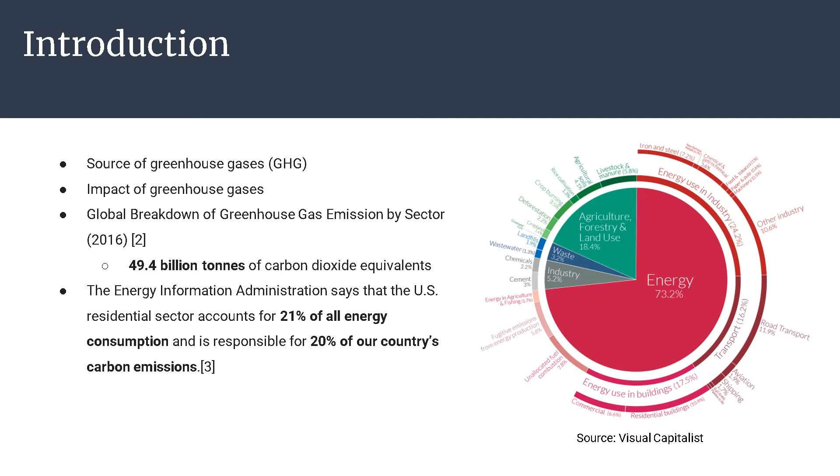To uncover the major sectors where these emissions originate, the graphic on the right pulls data from the 2016 Climate Watch and World Resources Institute Our World in Data article, when total emissions reached 49.4 billion tons of CO2 equivalents. Additionally, the Energy Information Administration says that the U.S. residential sector accounts for 21% of all energy consumption and is responsible for 20% of the country's carbon emissions.

The bar on the right illustrates the total number of housing units in the United States from 1975 to 2020. We can observe a large increase in housing units from 1975 to around 2010, and although the graph seems to indicate a plateau, the number of housing units is still slowly growing to this day. According to the data for 2020, there were approximately 140.8 million housing units in the United States.

This is significant because in the context of greenhouse gases, the emissions from a single household are multiplied by such a large factor that any change in energy consumption trends will have noteworthy consequences. Globally, heat accounts for 50% of all energy consumption and 40% of energy-related carbon dioxide emissions. In the US, 38% of greenhouse gas emissions from residential housing is produced from heating and cooling rooms, while an additional 15% is from heating water.

The thermal energy produced within the household is then lost to the colder outside environment due to conduction. We're mainly interested in climate zones where households experience cold weather conditions, because the colder the weather is, the faster the rate at which heat loss occurs. According to the graphic about continental U.S. climate zones, roughly half of the United States experiences snow or extreme cold weather, making approximately 70 million households that experience heat loss to a greater degree.

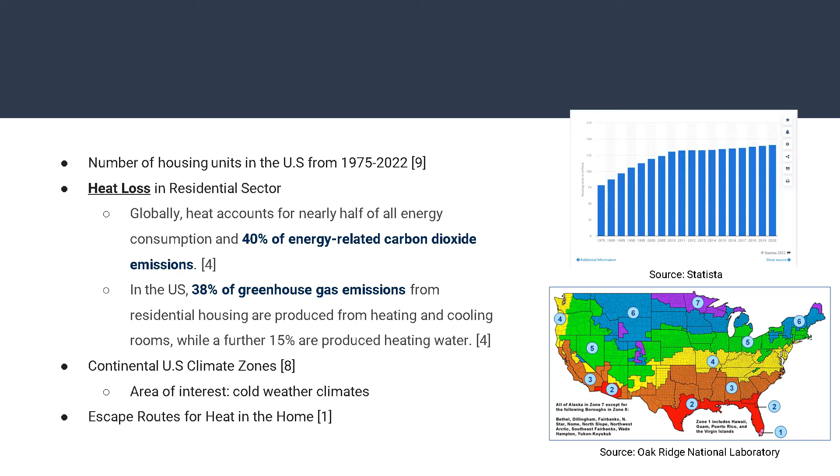Now, with cold and sleet covering your home in certain climate zones, homeowners may be more prone to turning up their heating appliances to warm their indoor temperatures. However, before increasing a home's heating bills, it may be helpful to look at where the home loses the most heat and to see if you can insulate it better. The more you can insulate the home, the less warm air will escape, and the less your furnace will have to work to heat your home.

Not only will this keep your heating bills down, but your HVAC system will actually last longer. If you do add insulation in your home, it can also benefit you in the hot summer months by helping retain cooler air in your home longer.

Now, the EPA estimates that homeowners can save an average of 15% on heating and cooling costs, or an average of 11% on total energy costs, by air sealing their homes, adding insulation in the attics, floors, over crawl spaces, and accessible basement rim joists.

Heat loss and cold air infiltration can be greatly reduced, and the heating system can be made efficient by using a variety of cost-effective solutions, such as types of windows, using blinds, drapes, and things of that nature. Now, with all the solutions listed, it is worth exploring a mechanical electrical design that provides similar thermal energy conservation techniques.

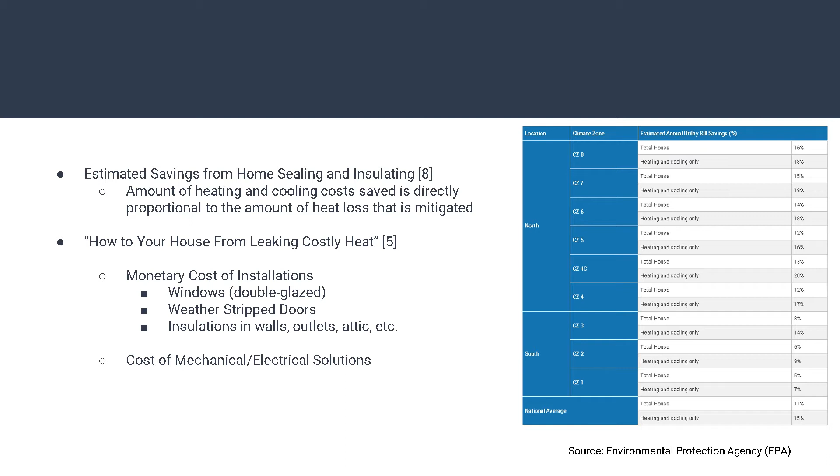The only constraint that would prevent the use of our solution would be if the monetary cost of our solution far outweighs the monetary cost of manual installations, as well as not providing enough benefits in terms of thermal energy conservation. With all that being said, our project definition is as follows.

The Energy Information Administration says that the U.S. residential sector accounts for 21% of all energy consumption and is responsible for 20% of the country's carbon emissions. Globally, heat accounts for nearly half of all energy consumption and 40% of energy-related carbon dioxide emissions.

In the US, 38% of greenhouse gas emissions from residential housing are produced from heating and cooling rooms, while a further 15% is produced from heating water. Therefore, heat loss is a big contributor to increased greenhouse gases.

The problem is constrained to climate zones in the US that experience cold weather conditions. And as of 2020, roughly 70 million housing units in the US experience these conditions and are impacted by heat loss to a greater degree.

Now, heat loss can be quantified in many different areas of the home: 5% through ceilings, 17% through frame walls, 1% through basement floors, 3% through doors, 16% through windows, 20% through basement walls, and 38% through cracks in walls, windows, and doors.

Now, the EPA estimates that a homeowner can save an average of 15% on heating and cooling costs, or an average of 11% on total energy costs, by air sealing their home and adding insulation in attics, floors, over crawl spaces, and accessible basement rim joists.

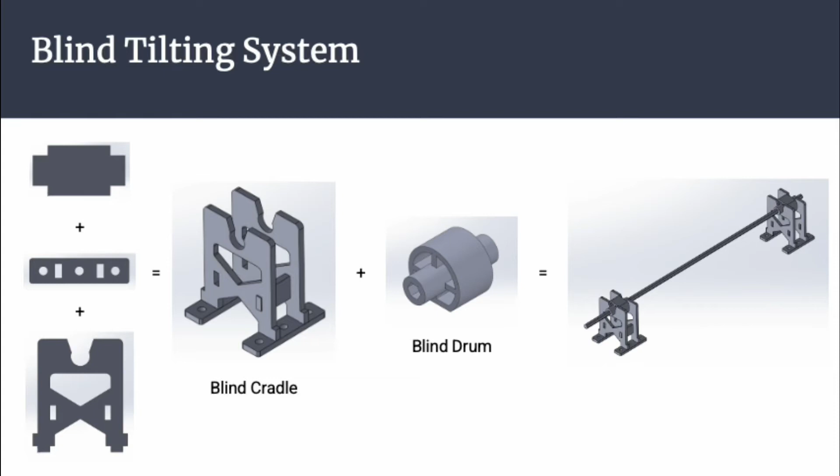So the other mechanism that we need in our blind compartment is the blind raising and lowering mechanism. It will be done by using a spool such as this one, directly coupled to the output shaft of a motor. In the worst case, this spool is going to hold the entire weight of the blinds, so it's important that it does not break or deform under torsion, because if it deforms too much, then that will cause the actual blinds to sag by themselves.

This spool here is the production model, and it will be attached to the motor's output shaft via set screw. However, we will not be able to manufacture this for the prototype design. So the prototype will use a spool from the blind set, and it will be press fit to the output shaft and will be strengthened using epoxy.

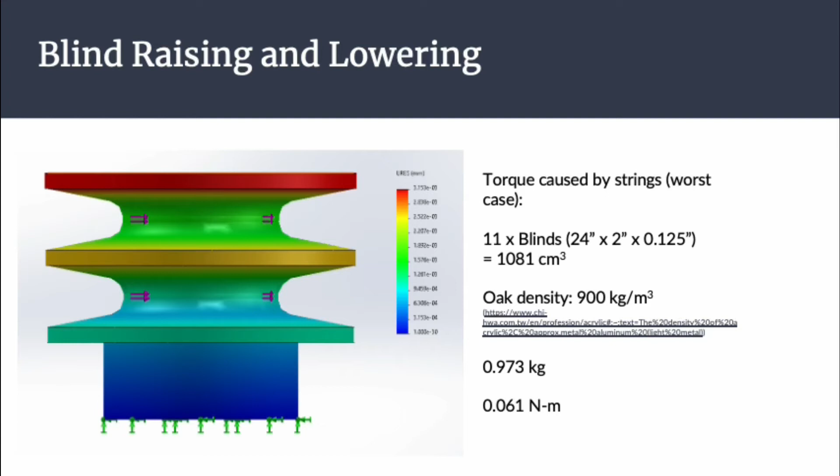So here's the motor that we chose that will power both of the previous systems that I discussed. It is a NeveRest Orbital gear motor. The gear ratio is high so that it is difficult to backdrive. We don't want it backdrivable in this case because if it's too backdrivable, then the torque from the blind weight will spin the motors, which will cause the blinds to droop slowly by themselves. But we want to maintain the blind height that we actually want the system to set it to.

So then the stall torque of this motor is also 2,400 ounce-inches, which is sufficient enough to overcome the weight of our blinds for lifting and tilting purposes. Here's the complete configuration of the blinds compartment with both motors and their respective blind systems. The motor on the right side is connected to the tilting system via a flexible shaft coupler. It was chosen to drive this shaft from the motor for reduced complexity. To do so, the output shaft of the motor needs to be raised to the height of the tilting shaft and will be done so by using multiple pieces of acrylic.

The motor in the middle will be used to raise and lower the blinds using the spool, as previously mentioned. The strings coming from the spool will need to go to the holes located directly underneath the cradle and will be directed using vertical metal rods that are not shown in this assembly, but the strings will just slide along those.

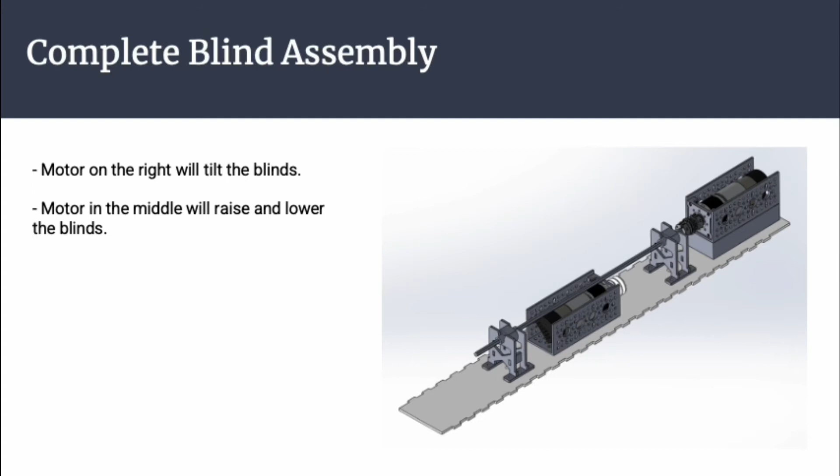Here's the current physical prototype model that we have. For the tilting system, the cradles and drums are assembled and already fit well in there. We are waiting on the platforms to mount that motor onto. The blind raising and lowering motor in the middle is attached as well, and we are waiting to put the spool on it.

A major issue that we came across during manufacturing of this is that the acrylic is not very rigid when it's this long. The material is strong enough to hold the motors, meaning it won't break, but it does sag noticeably. So if you look closely enough, we had to stack 3 layers of acrylic on top of each other, and this solved the problem for the prototype design.

However, for the production model, we will have to analyze different materials and thicknesses of those materials to find the optimal solution for this problem. So before we move on to the CAD designs for the window frame and window crank operator, we want to talk about the gear force analysis.

This was an analysis done specifically for the bevel gears that we use for the window crank operator, which were sourced from McMaster-Carr. Using the specifications listed on the website, we were able to use the shaft angle, module, pressure angle, number of teeth, face width, and even the input torque from the gear motor from one of the previous slides, and we were able to conduct an analysis of the 3 different forces

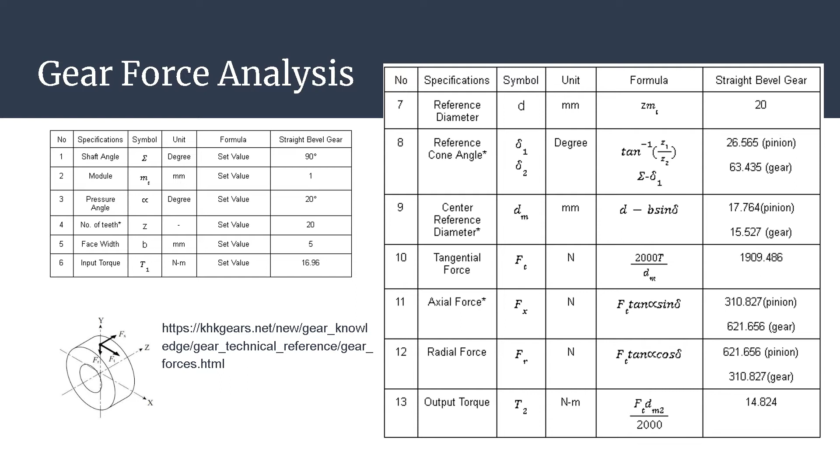acting on the gear. Now it's important to note that because the pinion and the gear are the same exact bevel gear, the module is 1 for both, and the table on the right shows certain values respectively for the pinion and the gear separately. These are the equations sourced from the link you see on the slide, and we were able to find the tangential, axial, radial force, and also the output torque generated onto the bevel gear.

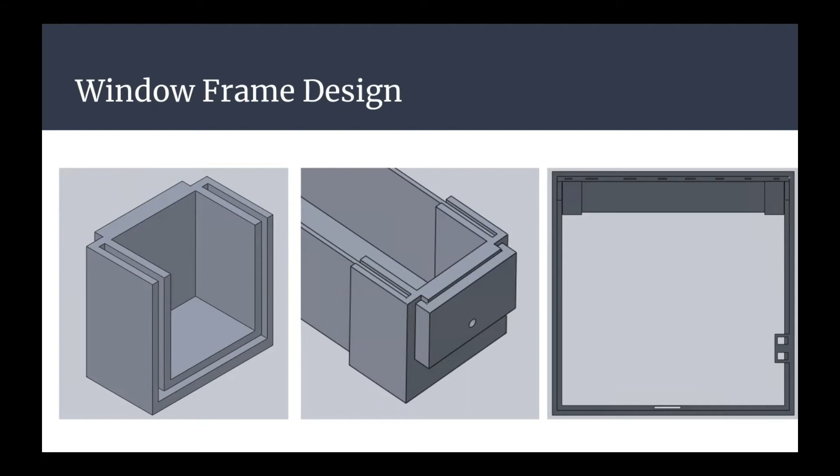The blind mechanism box you can see in the picture on the right goes in the top, and it is connected by these end caps on the left. The blind box will fit into these end caps and hold the sides together. And this bracket on the back side in the middle photo will allow the blind box to be placed on the window frame and allow a user or installation process to take the blind mechanism on and off without interfering with the window frame itself, as it will already be in place.

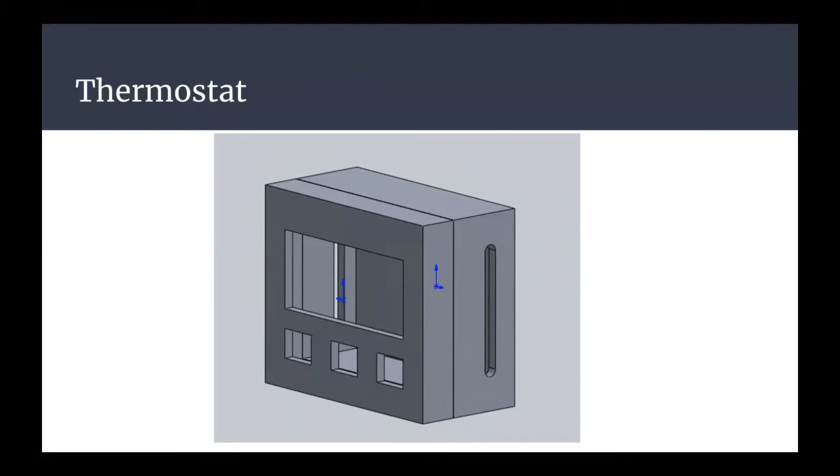And to add on to the production model, there will be a thermostat component. The thermostat will have a display shown in the middle here, along with 3 buttons for up, down, and mode. This will allow you to toggle between modes, whether it's opening a window, adjusting the height of the blinds, or adjusting the angle of the blinds. You'll be able to set the desired temperature of your house that the windows will seek to achieve on this thermostat.

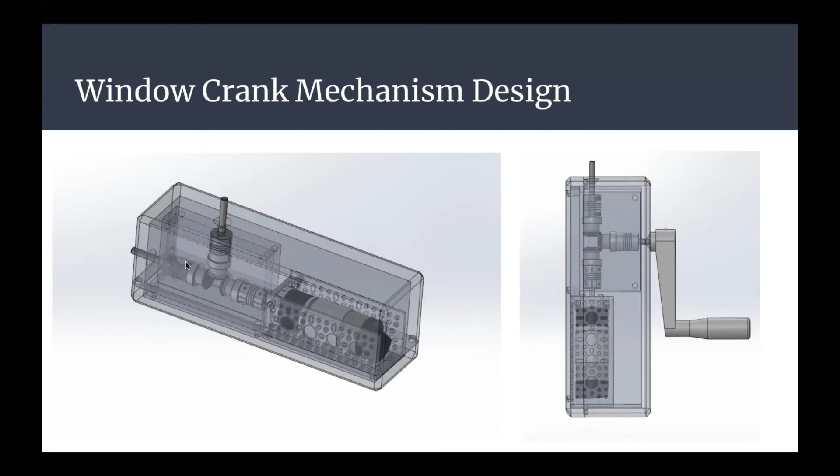In order to prevent this from happening, we will be making an encasement that will reduce the degrees of freedom so that the window casement and motor will rotate. And to do this, the encasement will have to use bearings and the motor will be angled at 30 degrees. By using this encasement, the crank operator shaft should no longer have any space to move, which should get rid of the misalignment of the teeth.

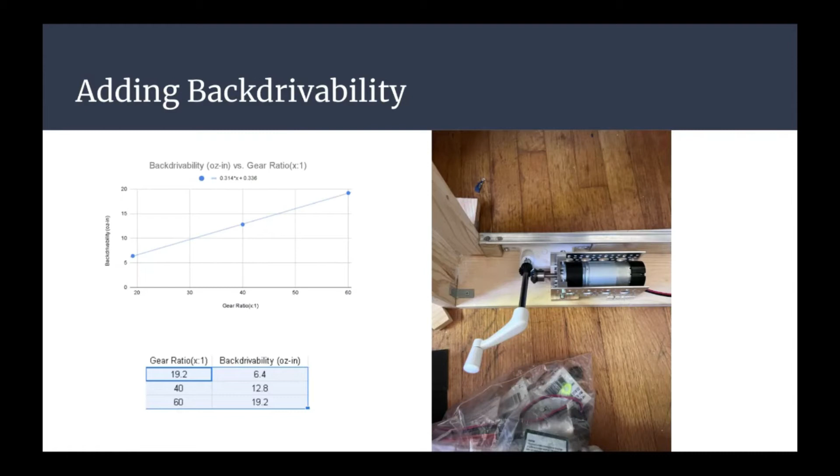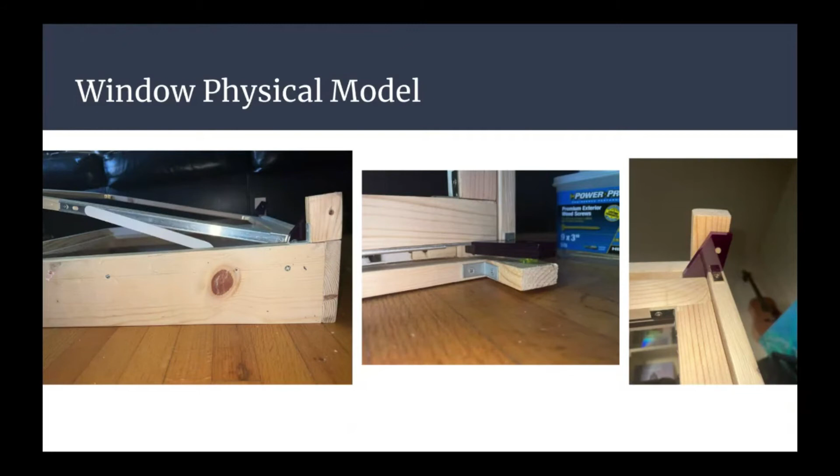And for the overall design requirements versus outcomes, our window and blind system is able to move according to the input temperature and light sensors. We were able to incorporate a crank for the back drivability so that the user will have a manual way to open and close the window in case of emergencies. Our current prototype is much bulkier than when we first designed it, and so we hope that our final product will be much smaller and hidden, and thus more aesthetic.

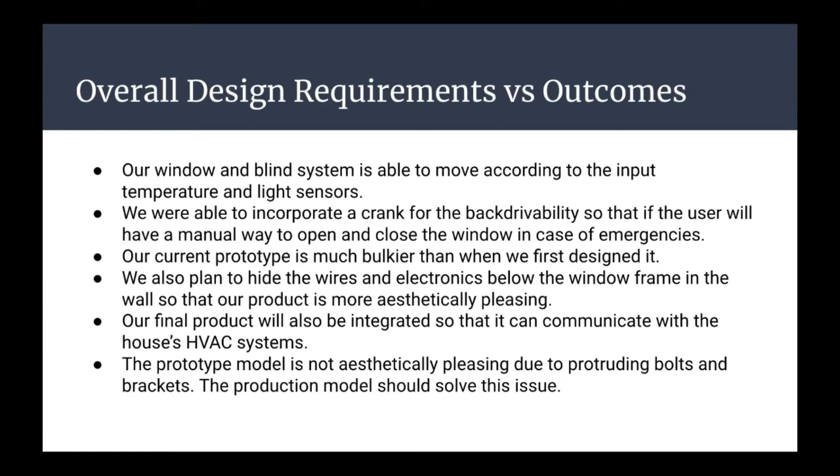We also plan to hide the wires and electronics below the window frame in the walls so that our product is also more aesthetically pleasing. Our final product will also be integrated so that it can communicate with our house's HVAC systems so that it can reduce the amount of time the user uses the AC or heater. The prototype model is not aesthetically pleasing due to protruding bolts and brackets, and our production model will have these more hidden.

So let's talk about the electrical components of our blind system. So for our sensors, we have two kinds. We have a light sensor, which is a light-dependent resistor, a photoresistor, and we have two temperature sensors, and they're going to be the TMP36 analog temperature sensor. And how that works is it uses the relationship between temperature and voltage across the diode. And for our motors, we have the NeveRest Orbital gear motor, 12 volts.

We have two types of motors, one with about 20 to 1 gear ratio, another 263.1 to 1 gear ratio. And then they'll be controlled with the L293DNE motor controller. For our microcontroller, for the brains of the whole thing, we have the Arduino Uno.

And for our user interface, which our customers will be using to adjust temperatures, adjust modes, will be a 16 by 2 character LCD and an I2C backpack for ease of connecting to the microcontroller, and some push buttons to be able to interface with the rest of the system. So this is what the general wiring will look like.

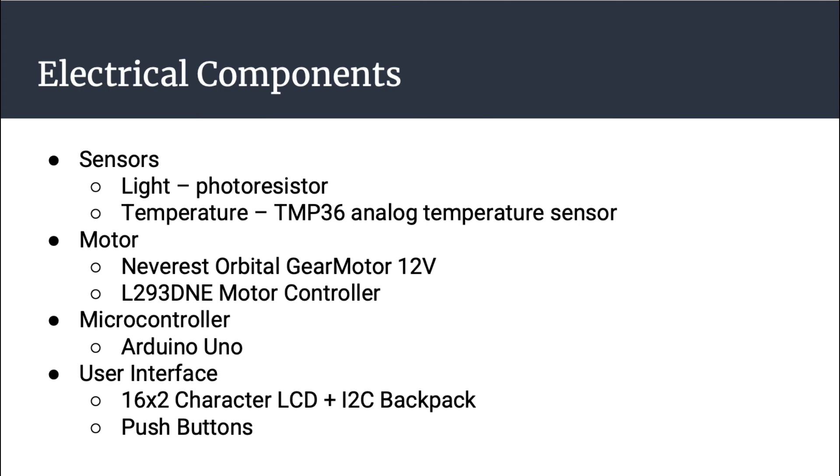So on the top left corner, we have the temperature sensors connected to 2 analog reads, and the light sensor in a voltage divider also hooked up to an analog read. So that will just be read by the analog read function, and through a series of conversions for the temperature sensor, we can derive Celsius and Fahrenheit from the voltage.

And for the light sensor, we're using an arbitrary scale based on measuring what resistance or what voltage we get in darkness and what resistance we get in sunlight, and then we convert that into a scale of 0 to 100 light intensity. On the right side, we have our UI.

So we have our LCD and the backpack, which will allow us to use the I2C protocol to communicate with it. And we have some push buttons connected with pull down resistors, and those would be operated by interrupts to determine whether those buttons are pressed or not. And then at the bottom, we have our motors.

So 3 motors for our system, 2 for the blinds. One will basically deploy and pull up the blinds, and the other one will control the tilt of the blinds. And then the window one is just to open and close the window. And all of them are being operated by the L293DNE motor controllers.

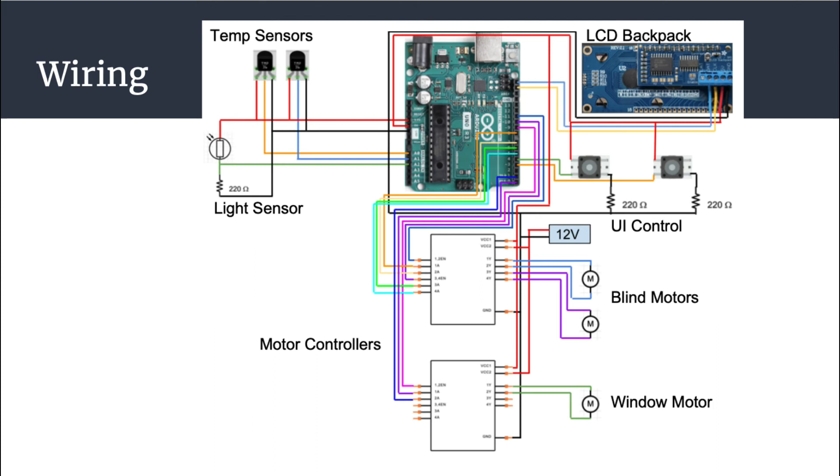So once we had the components, we want to test each of them one by one to make sure they operate as intended. So for the light sensor, we just build the voltage divider as we had in our wiring diagram, and we measure the voltage across that divider. And we also want to demonstrate a threshold capability, and we demonstrate that once the voltage across the resistor is less than 0.03 with a 10K resistor, then that LED will turn on.

So if we play this video, we see that we successfully have done that, shining a very bright flashlight, about I think 1/3 of the brightness of the sun. We can see that that LED shines. Next, we have the temperature sensor test.

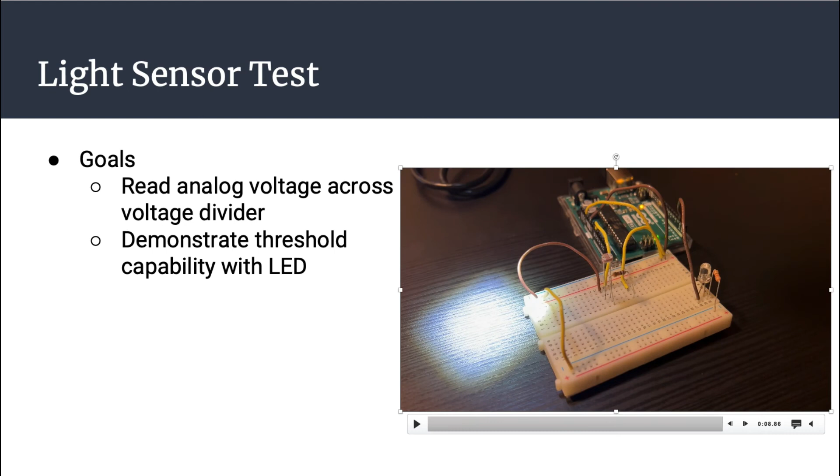So very similarly, we connect analog read to the sensor pin, which is the middle of the TMP36. The right end is to V in, 5 volts in this case, and the other side is to ground. And we also want to demonstrate threshold capability with this, with an LED. So right here, we indicated that 24 degrees Celsius is the threshold.

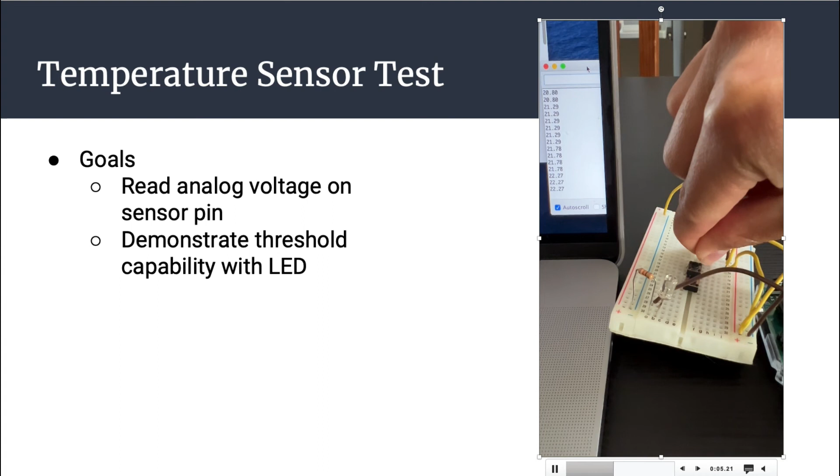So right now you can see the temperature is about between 18 and 19 degrees Celsius. And if we play the video, you can see I put my finger on the sensor, and you can see that temperature slowly rise. And once it passes 24, the LED will come on. This is not shown in the video, but if I do let go of the sensor, then the temperature will cool down and the LED will turn off.

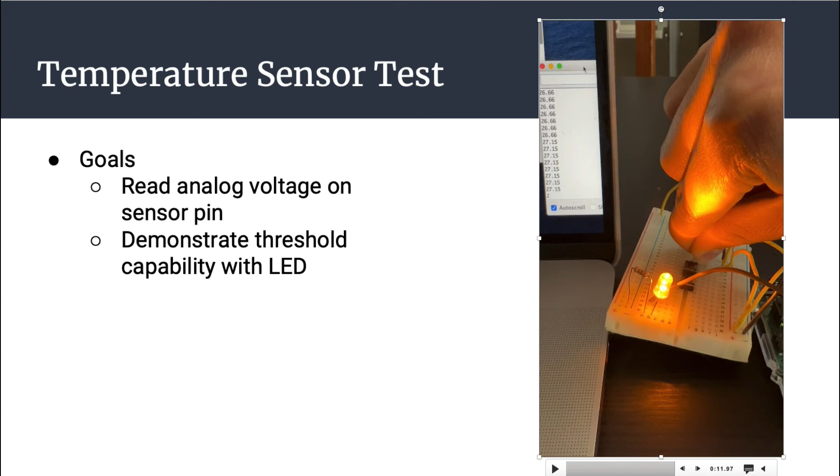Next, we have the motors, the encoders, and the LCD, and being able to interface with the LCD with a very scrappily put together UI. So here we want to demonstrate that we can measure position of the motor using the encoder, be able to change states through the UI by pressing the button, and control the LCD using the I2C protocol. So go ahead and play this video.

Basically what we've built here is the motor has two states. One state is moving clockwise, and the other state is moving counterclockwise. I believe forward is indicating counterclockwise, and reverse is indicating clockwise.

And the number below that is the motor position, which is basically the number of revolutions from the starting point that the motor is positioned at. So if I go ahead and play the video, we can see right now it's going counterclockwise, which is indicated by forward.

You can see the number going up, and each revolution it makes, it turns into 1. We flip the direction, and once it makes a complete revolution, it goes negative, which we don't actually see here. And how we change state is just a press of a button, which is being controlled by an interrupt.

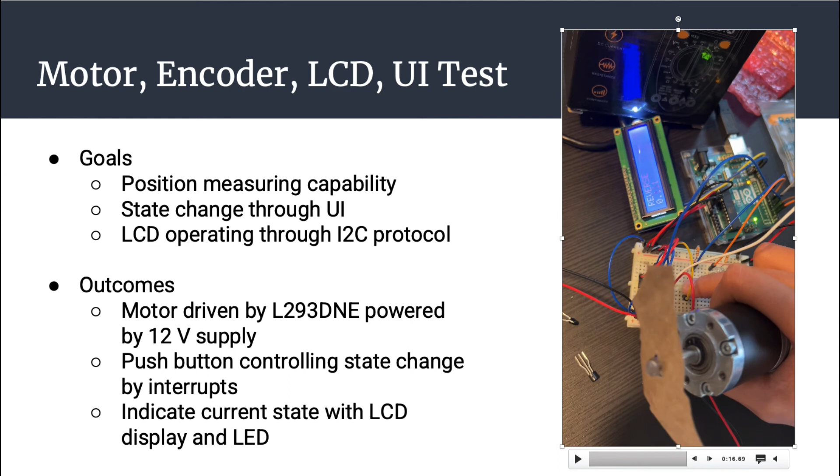Once we tested all the components, we went ahead and developed the hardware abstraction layer. So the goal here is to encapsulate each of these components into separate files away from the main setup and loop file, and that makes it easy to develop, test, and debug our system when we put it together.

So the classes we have are a class for the temp sensor, a class for the light sensor, a class for the LCD, the motors. We have 3 subclasses to allow us to dictate what is fully open and what is fully closed for each of the components, and then a whole controller class, which we will use to take in inputs and actually dictate the position of our system given inputs from our sensors.

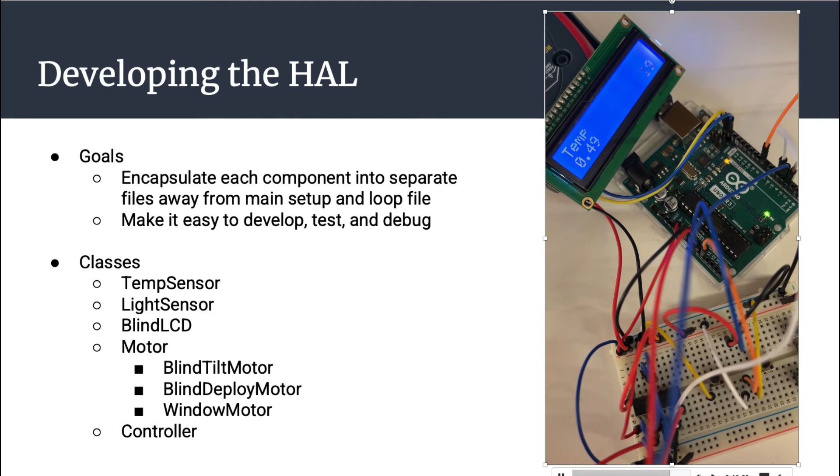And the actual controller. Calibration is essential because every room will have different thermal properties, so a single controller will not be optimal for every situation. This means it's best to take a few measurements and use that to optimize the control system for that specific room. To calibrate itself, the window will set the blinds and window hinge to their extreme values one at a time. This will ensure the most accurate measurement of the effect of each component.

As it's doing this, it will take 4 measurements of temperature to obtain 3 measurements of heat transfer rate. We use a simplified thermal model that includes 3 unknown parameters in addition to sensor values. So once 3 measurements are taken, we can simply solve the system of equations and obtain the complete thermal model. The controller itself will use this model in reverse in a feed-forward to set the desired heat transfer rate.

If the room is colder than its target temperature, the window will attempt to transfer heat into the room, and if the room is warmer than its target temperature, the window will attempt to transfer heat out of the room. The target heat rate is proportional to the temperature error.

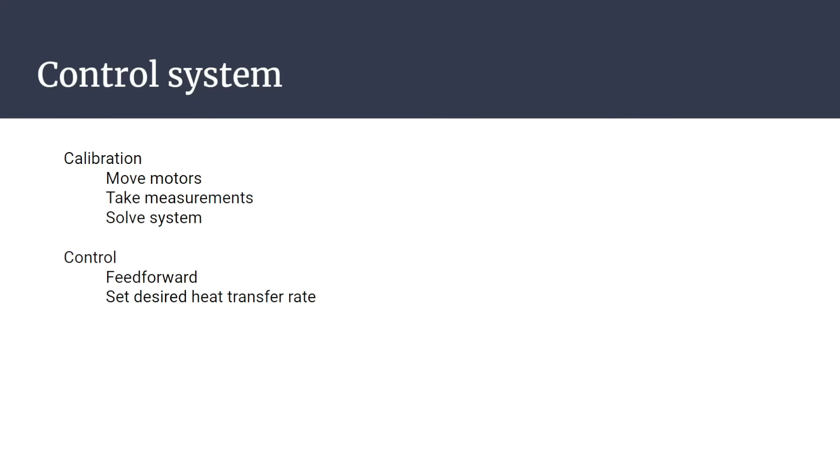Our simplified thermal model models heat transfer rate in terms of the motor positions, light, and temperature levels, specifically the temperature difference between inside and outside, as well as 3 parameters A, B, and C. The A term roughly represents the effect the blinds have on temperature, the B term represents the effect the window opening has on temperature, and the C term captures any remaining constant offset, for example, from a heat source inside the room.

While this model is simple enough that it can't really capture some more subtle nonlinear effects, it has the advantages of being both easy to calibrate for a specific room and easy to solve for desired motor positions given a heat transfer rate. For example, given a heat transfer rate, to set the desired window angle, you subtract the blind angle and constant terms from the heat transfer rate, and then divide by the temperature difference and the B term. Thus, you obtain the desired window angle directly.

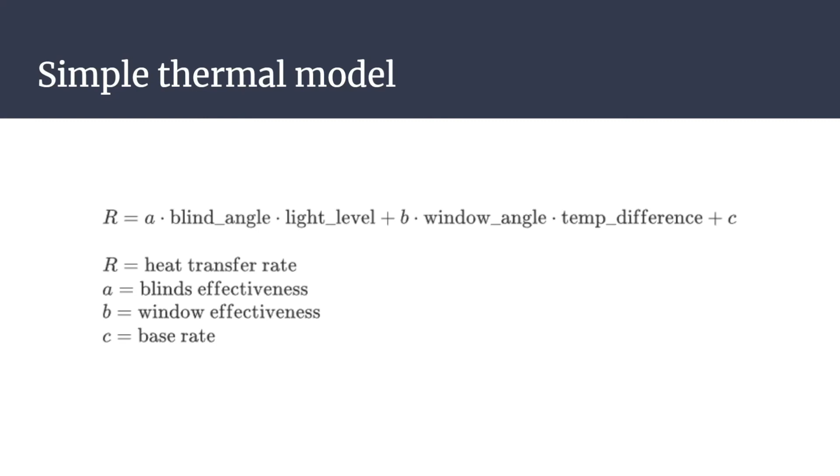Here's a short demonstration of our control system. In the top right corner of the display is the outer window temperature, and in the bottom right corner is the inner window temperature. The remaining value represents the window motor's target position, where a more positive value means a more open window. As the blinds motor is not connected, the system does not attempt to control it.

The control system is attempting to maintain a temperature of 22 degrees Celsius. At the start of the video, I'm holding the outer temperature sensor to heat it up. This means that the window's target will be negative to minimize heat gain from outside.

As I let the inner temperature sensor cool down, the room becomes colder than its target at 21.8 degrees, so the window target will be very slightly positive to gain more heat from outside. As you can see here, the target refreshes every 10 seconds, and it switched to 0.03.

Then, as I hold the inner temperature sensor and let the outer temperature sensor cool down, the window will close to try to avoid shedding heat to the outside, but then, as the inner temperature sensor becomes hotter than the outer temperature sensor, the window will start to open in order to shed heat from the room. This is the intended behavior.

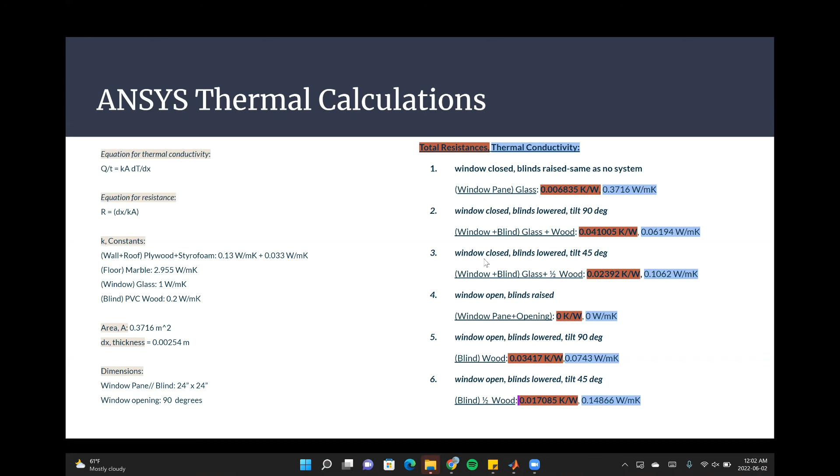Obviously, putting in more cases, so essentially putting in each state, each degree of tilt of the blinds, and each window tilt degree also would improve accuracy. So these are the bare basic numbers that we're using for our Simulink model, which will be discussed in the next slide. We started modeling our system in Simulink because we wanted to show that our system would be cost effective for customers who bought it.

We took an example project from Simulink that provides a thermal model of a house with a heater and added in our system and a cooler, an AC. There were a few bumps along the way as we learned how to use Simulink properly and the limits of what we could and couldn't do with it, as well as understanding the model itself and how we should use it.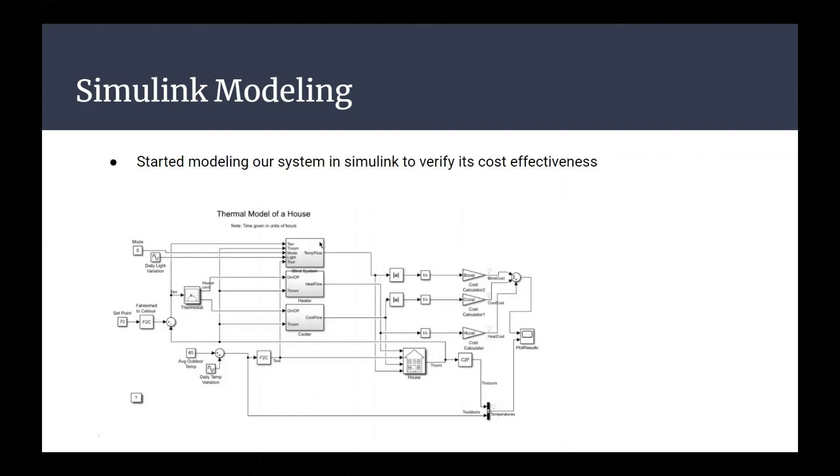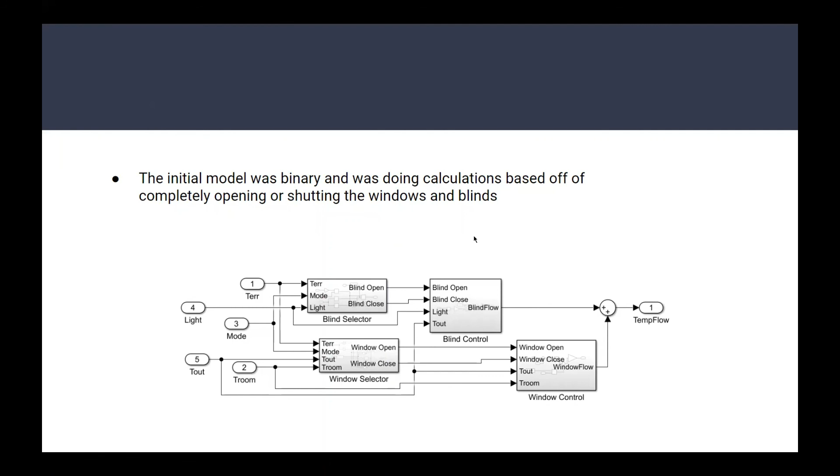Initially, the entire system was one block, which made it unreadable for anyone not involved in the work. So we broke it down into multiple subsystems for organization, as well as testing and ease of viewing for people who didn't build the model themselves. Also, our initial model was binary, meaning that we were only completely opening or shutting the blinds and the window and not having a variable position.

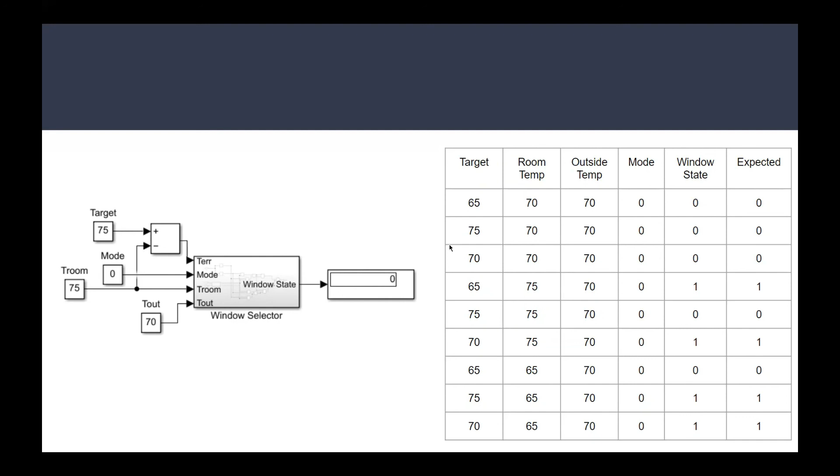Currently, we have transitioned the model from a binary to a non-binary model that can output the current angle of the blinds, the height of the blinds, and the opening of the window. Using the binary model, we had already shown to ourselves that the system was cost effective. Once we work out the few remaining modeling issues that occurred when we converted from binary to non-binary, because the logic doesn't work exactly the same, we hope to show the same results using both tables and graphs as visual aid.

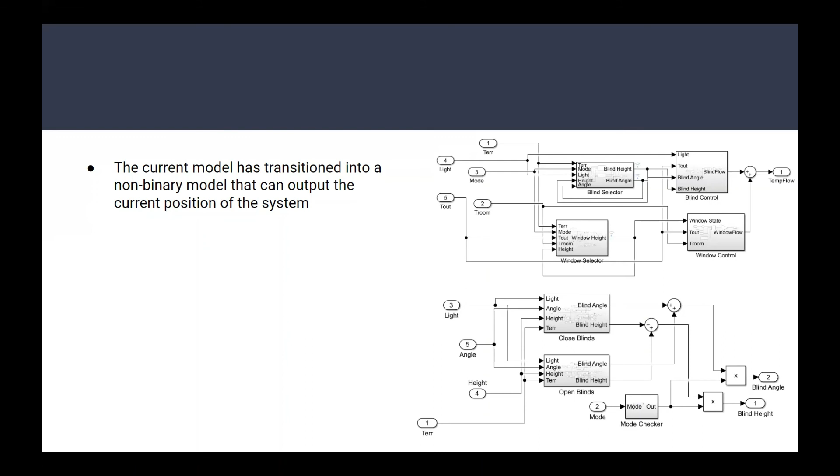For the conclusion and discussion of our project, for future plans of the smart blind system and the actual product design of it, we plan to manufacture a more sleek and white design, getting rid of the wood design and putting in white plastic, implementing a customizable window that fits a homeowner's desired needs for functionality and aesthetics. For example, we would want to be able to alter the size of the window and change the wood color. The user can do light wood, dark wood, or just plain white or black.

We'd also implement remote smartphone control access, so you can set the desired home temperature from your phone, and also manually open and close the windows and blinds remotely from the phone. Using our smart home system removes the worry about maintaining the temperature of a homeowner's house and the worry about turning on and off HVAC systems.

In the end, the user eats the cost of the system upfront, but will break even in about 9 years. We just did a couple calculations using the average yearly cost of using HVAC systems in an average home in a very, very cold Midwest area, and found it to break even around 9 years.